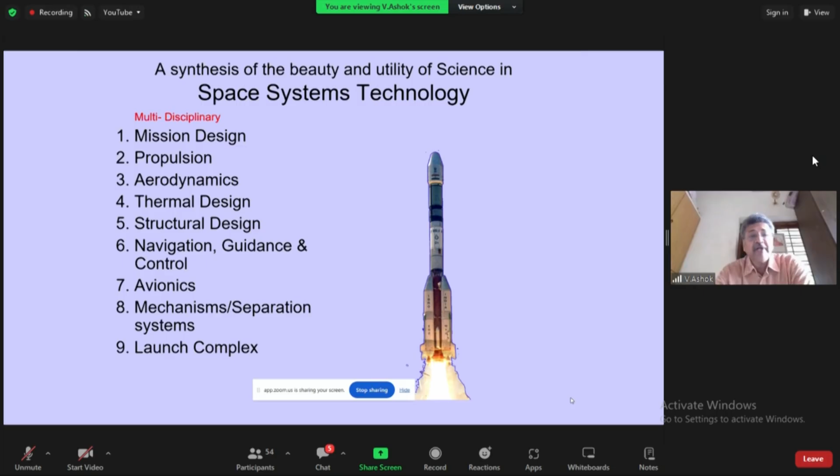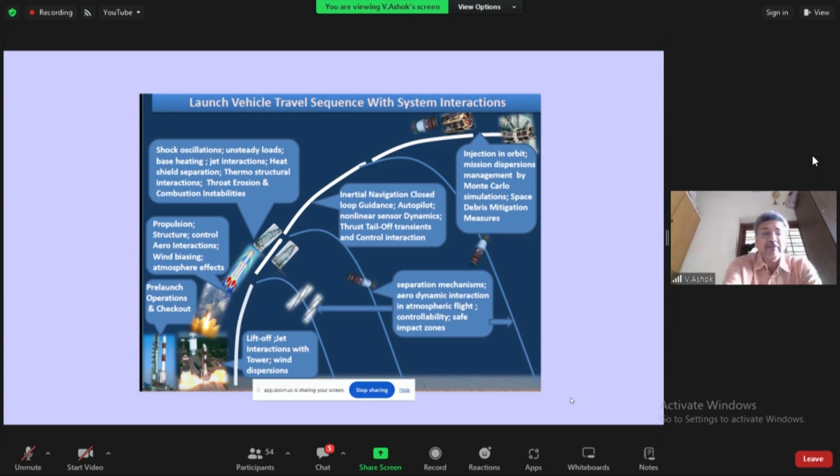So now, if you have to sum up the various challenging problems in launch vehicle missions, this one slide will tell you which are the very interesting problems. Right from the liftoff to the injection of satellite, we have various problems. At liftoff itself, we have the jet interactions with tower interactions and wind dispersions, and there are a lot of issues there also. Then moving on to the atmospheric phase of flight, you have the propulsion structure control aero interactions, and then the shock oscillations, unsteady loads, base heating. These are all in the atmospheric region of flight. Subsequently you have the closed loop guidance, etc., and injection into the orbit. So we will mostly focus on some of the interesting problems during the aerodynamic phase of the flight.

If you want to sum up the problems, on the left hand side you have the aerodynamic problems, and on the right hand side you have the aerothermal problems. You can see that there's compartment venting and the shock oscillations which cause the buffet. That means we have to quantify the unsteady forces. Of course, this particular aspect is still a challenge for CFD, because we still rely on experiments. Then there is also the aerodynamic noise coming from the strap-on shock interactions. Then there are jettisoning rockets which are used for separating the strap-ons, and the lift-off aerodynamics. These are some of the important things, and multi-jet interaction and aero loads on nozzles.

But we also have special problems like re-entry aerothermodynamics, flow and combustion studies in air-breathing engines, and dynamic stability of the re-entry capsule. This is one of the very interesting problems. That is, we have to calculate the dynamic stability, the aerodynamic damping that comes when there are oscillations of the crew module during the re-entry phase. And we also have two-phase flow with combustion. That is also a very interesting problem.

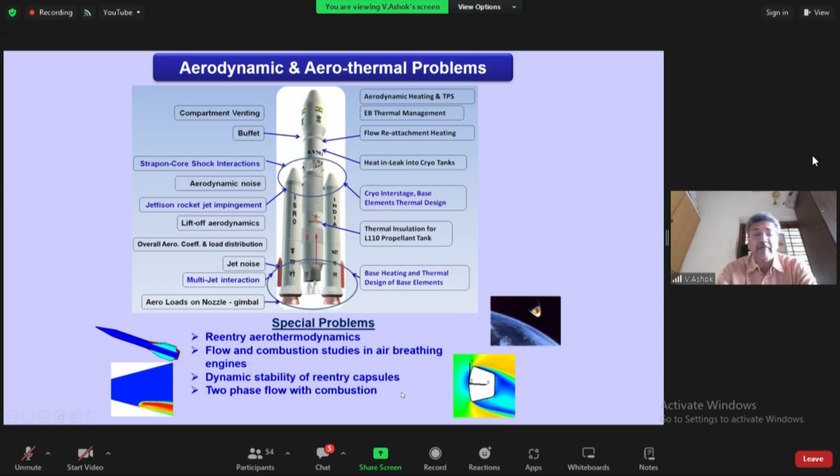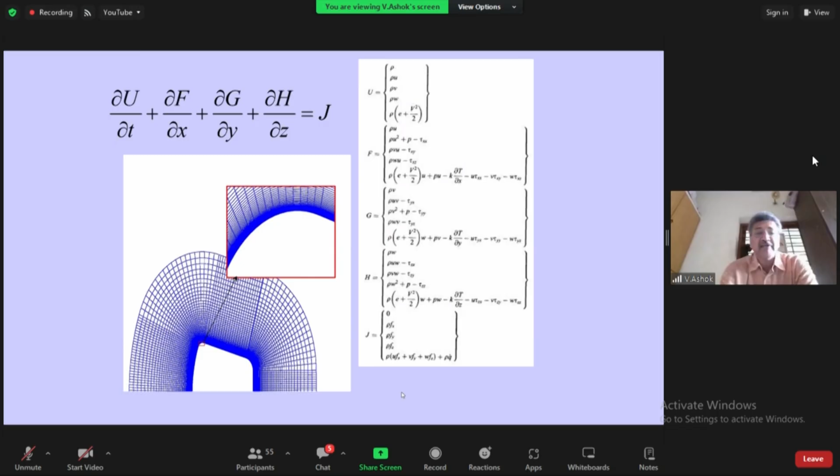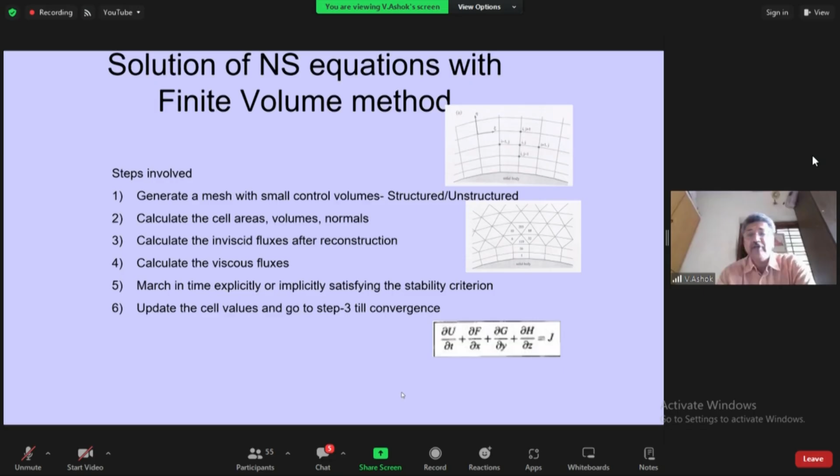As you know, in CFD we solve the Navier-Stokes equation, and I don't have to tell this audience about this equation. It is very familiar, and this is on a structured grid on a re-entry capsule. These are the steps involved: you generate a mesh, then you calculate the cell areas and volumes, calculate the inviscid fluxes after reconstruction, and then the viscous fluxes. You march implicitly or explicitly satisfying the stability criterion and update till you get convergence. So this is a very standard finite volume methodology. Now let me tell you very briefly about some of the solvers which we have.

One is the parallel aerodynamic simulator, which is on a Cartesian mesh, a very automated Cartesian mesh, and which has K-epsilon turbulence modeling, inviscid fluxes using an approximate Riemann solver. We use the primitive variable Riemann solver, and viscous fluxes by central differencing. We have second order upwind with a minmod limiter, and it is fully explicit. It's not in implicit mode, but it's parallelized with multi-threading on GPU platforms.

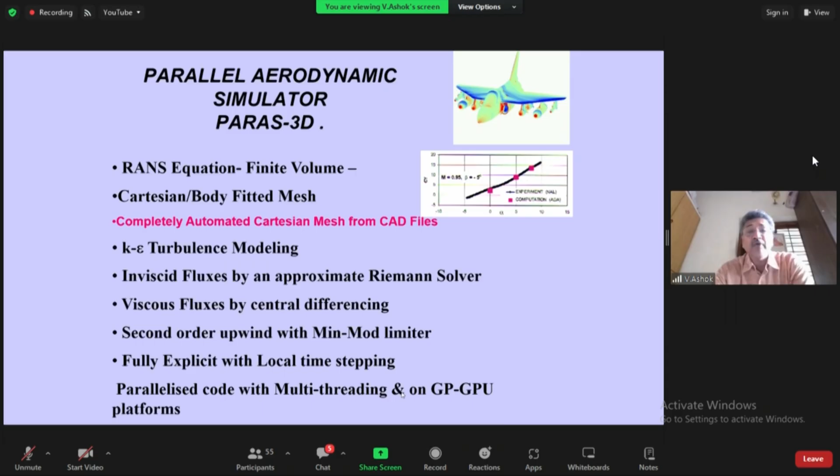And this code is now running in various organizations like ADA, ADE, DRDL, etc. This is a workhorse code for us because very fast we can generate the mesh and give the results. And these are some of the developments which we did on this. We have now included the multi-grid technique. The multi-grid acceleration is there, multi-core, multi-GPU version, and multi-grid CPU version.

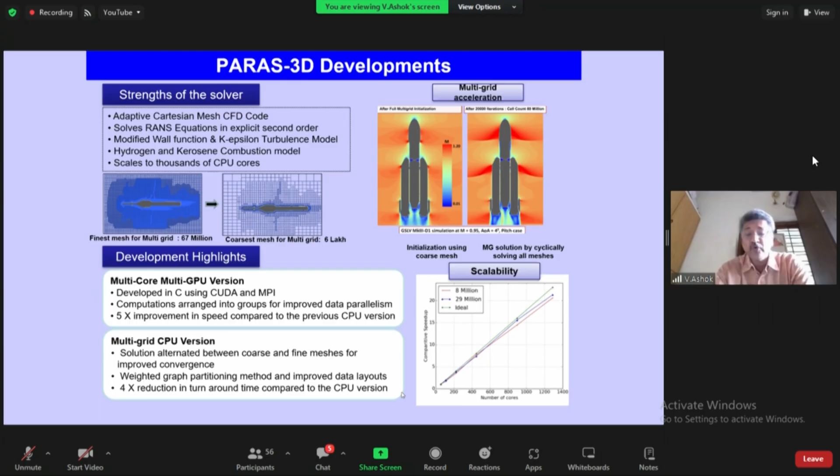And so we have done special techniques in this, which actually enhance the performance of even the CPU itself. Because as you know, all these CFD codes are memory bound. And so if you want to use the GPU platforms, we need to have a single instruction, multiple data type of architecture. So we need to group these cells before doing the computations. The computations are done group by group.

We have partial cells, then boundary air cells, partial cells whose neighbor is split, air cells whose neighbor is split, partial cells whose neighbor is split. They're all in different categories, so that you get maximum benefit from the GPU. And by doing these computations, the CPU performance itself has improved by something like 3x, 4x. So that is the advantage you get.

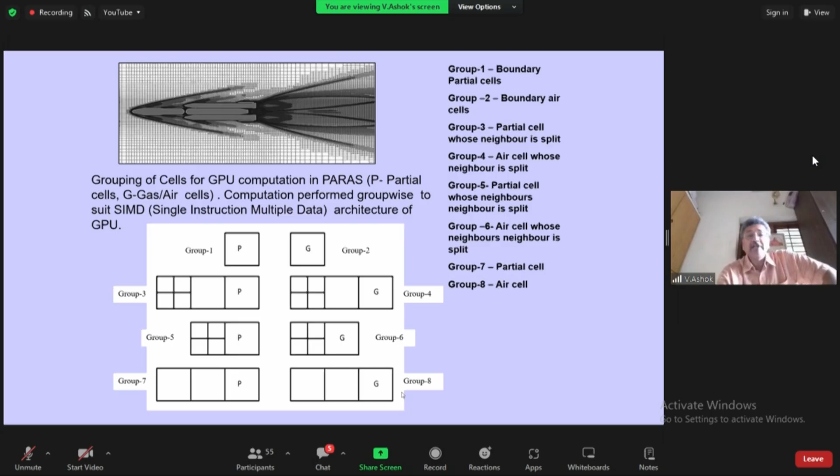And we also have an unstructured based parallel RANS solver for aerospace vehicle aerothermodynamics called Pravaha, which we have very recently developed and worked on for the past around 5 years. This is not on a Cartesian mesh, this is on an unstructured mesh. So the mesh generation has to be done by some mesh generation tools. And with this also we have various types of solvers like AUSM, AUSM plus, Roe, HLLC schemes.

But the challenge here is to build robustness in the CFD codes. That is where the real thing comes. In fact, if you are using solvers which are open source, you may find difficulty in those areas. Because in an industrial framework, suppose you want to do very fast computations, your mesh may not be very accurate. The quality of mesh may not be that good. There may be more skewness. But your solver should be capable enough to handle those.

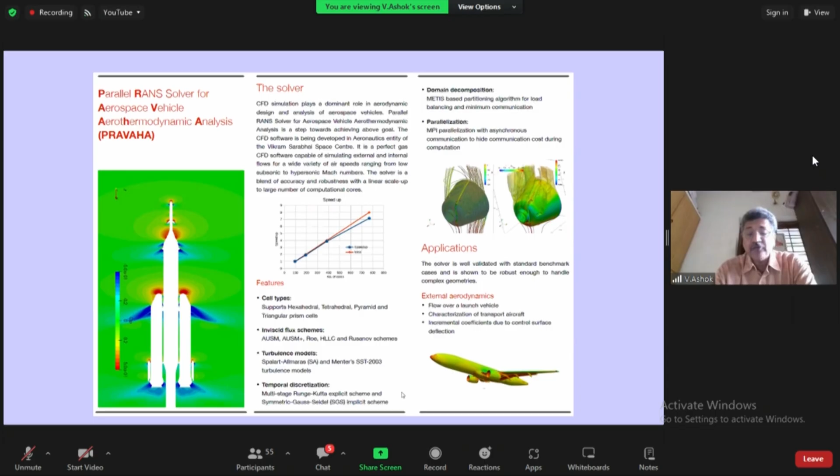You may lose accuracy. Instead of coming to 95% accuracy, you will get 90%. But in an industrial framework, that's okay, because when we explore various configurations, we want to weed out some configurations, so even 90% accuracy is good enough. What is important is you get very fast results, and you should be able to automate and couple with optimization techniques. That means it's very important to build robustness in the solvers. And we have done that using some special techniques.

And these are some of the applications which we have done. This is on a crew escape system with all those jets. We are also on the reusable launch vehicle technology demonstrator. And we also have something called the SPICES workshop during the symposium of applied aerodynamics, to be conducted on December 12th, where we put a standard problem and ask the CFD groups to solve it, and then we meet together and see how good it is, and the experiment results are not revealed.

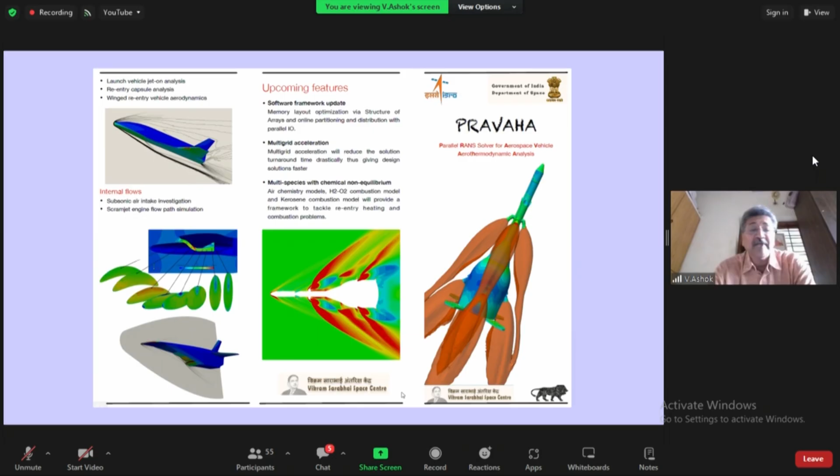So we are going to have a hypersonic air intake on December 12th. The geometry is given to all the organizations. Something like 15 organizations are going to participate, and we will see how the results compare with the experiment results. Now let us see some of the applications. This is a typical flow field of the GSLV at Mach number 0.9. You can see a terminating normal shock.

Now these normal shocks will start oscillating and will give rise to acoustics. That is where you have problems getting it from CFD, and you need experiments. But you can very well get the forces and moments from these CFD techniques. In fact, it is like a fluid dynamic zoo.

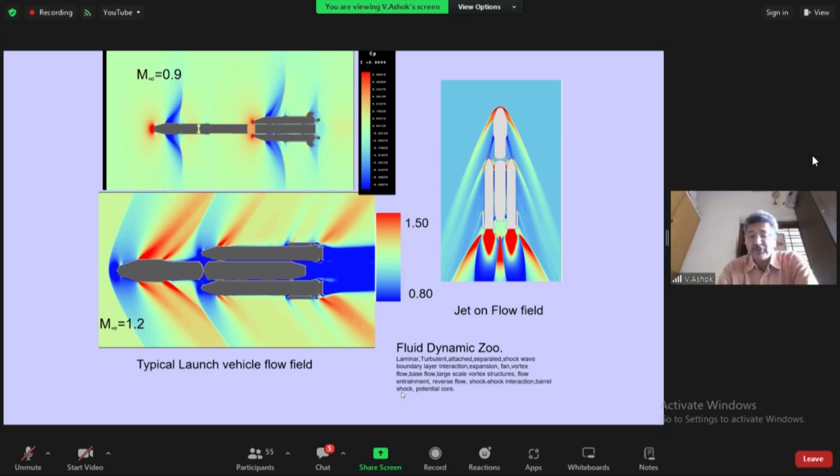You start with laminar, it becomes turbulent, then you have attached flow, separated flows, shock wave interaction, expansion fan, vortex flows, base flows, large scale vortex structure, flow entrainment, reverse flow, shock interactions, barrel shocks and potential core. All those things are there, so it's like a fluid dynamic zoo you can see in this particular flow field. This is a terminating normal shock on the cylinder.

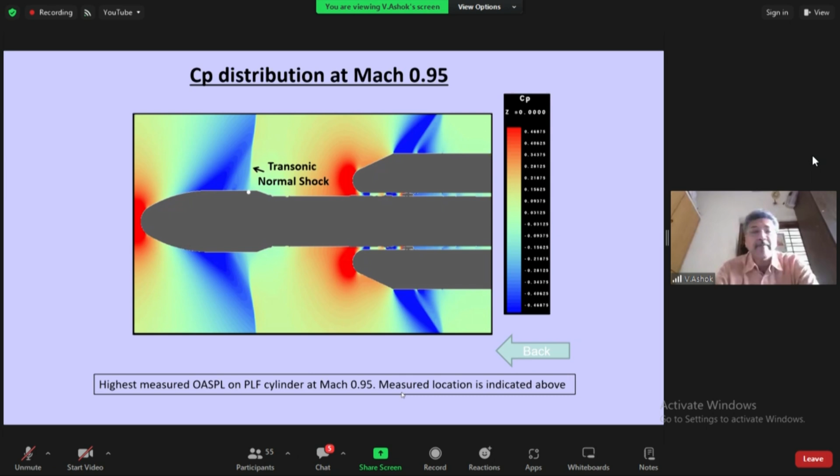Of the GSLV this one, but the real challenge is to get back what is the acoustics on this. Now, these are some of the challenging flow problems you can see here. We have certain things which are already carried out.

This is RLV reusable launch vehicle technology demonstrator, scramjet, GSLV Mark III, crew escape system at the pad abort test, and we had very recently done the landing experiment, the Chandrayaan 3, the test vehicle which we have done recently, the Gaganyaan, and then we have the future, the RLV orbiter and the scramjet. The airframe integrated scramjet with an air-breathing engine, where thrust minus drag positive is a very, very challenging thing. It is something like an X-51.

And high angle of attack aerodynamics for RLV landing experiments, multi-jet interactions in Chandrayaan 3, and also the dust that is coming because of the reverse flows, the test vehicle with the crew escape system, and we have also challenges in OneWeb mission of the launch vehicle Mark III, wherein we have the two-phase flow with the sloshing involved, and winged re-entry of the RLV orbiter.

Parachute inflation aerodynamics is one of the very, very critical things. What happens during the first few seconds when the parachute is getting inflated? Are you able to do an FSI, fluid structure interaction, and get the loads and see whether everything is fine or not? Then inflatable aerodynamic decelerators, these are things.

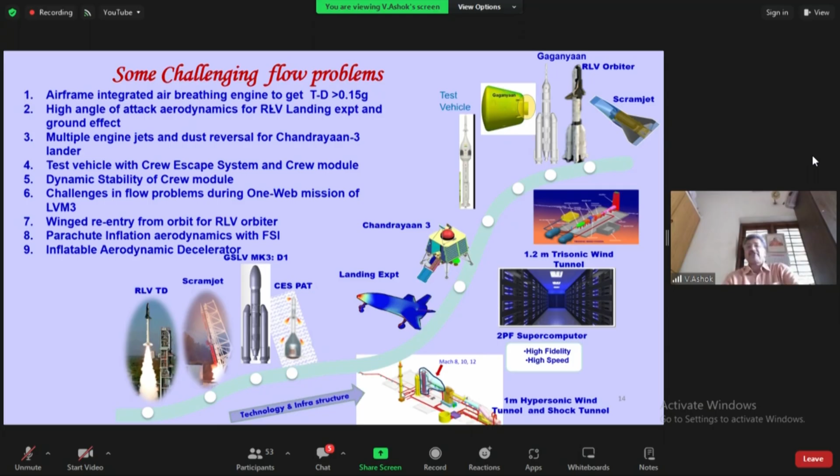And on the bottom side, you can see our capability in terms of facilities. We are now going to have the capability of wind tunnel testing from 0.2 Mach number all the way to Mach 12, and we are also going to set up a 2 petaflop supercomputer very soon. And this is some of the very typical things you can see here.

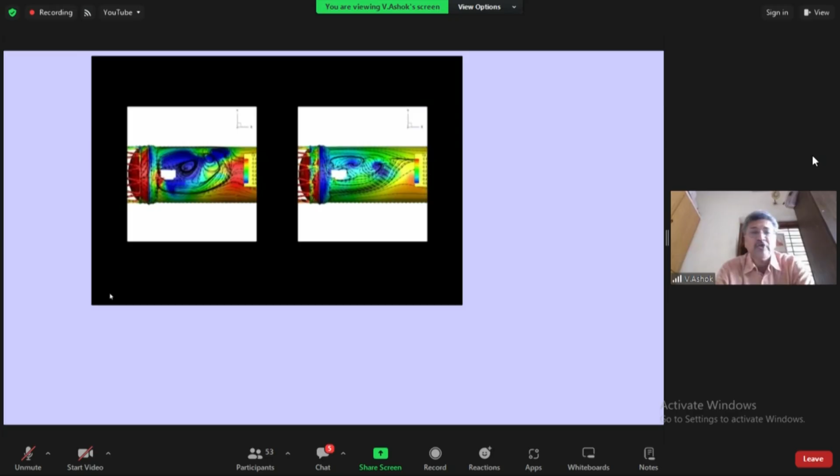This was the earlier configuration of the launch vehicle Mark III, which had a straight nose cone and also the strap-on also straight. And then on the left side, we improved upon it and made it a standard nose cone. What I want to stress is on the strap-on to nose cone attachment, there will be a vortex that will be shed, and this will give rise to larger acoustic levels. So you can see this is the case with the straight nose cone, and the other one is the standard nose cone. And this was actually giving us larger acoustic levels.

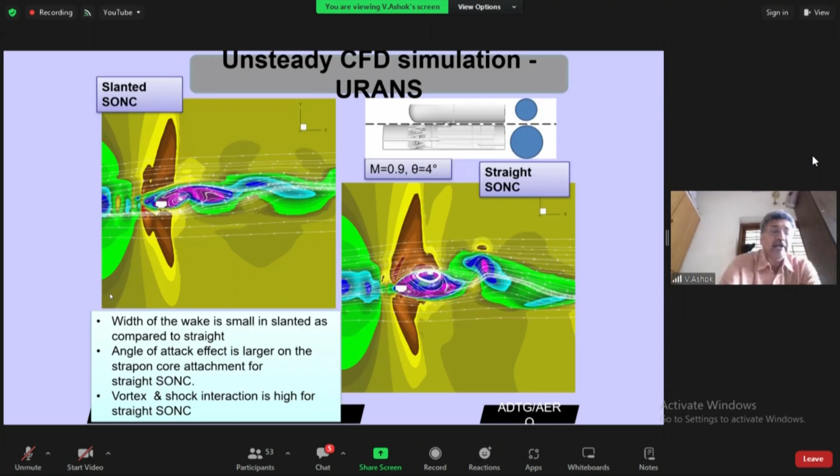And this is on the cut plane. You can see there the typical shock vortex interactions, which are enhancing the acoustics downstream. And this was what we got. We measured it actually, and we got benefit by doing this. We had almost 9 dB extra in the adapter just behind the strap-on nose cone. So this is the benefit you get by doing such studies. It's an unsteady study, of course, a URANS study.

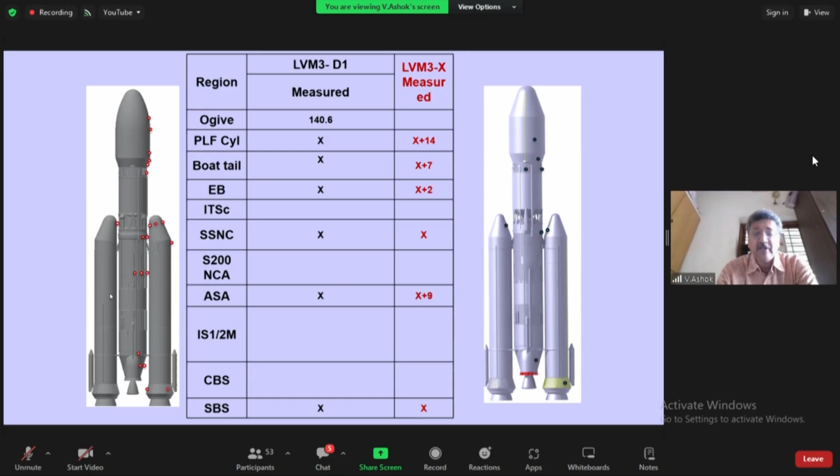And the way in which we do the aero data methodology is, of course, this is the flight configuration. We have the wind tunnel test. And of course, the wind tunnel will not be the same as the flight configuration, so there may be some differences. That difference is called the geometry correction, and the CFD does the corrections.

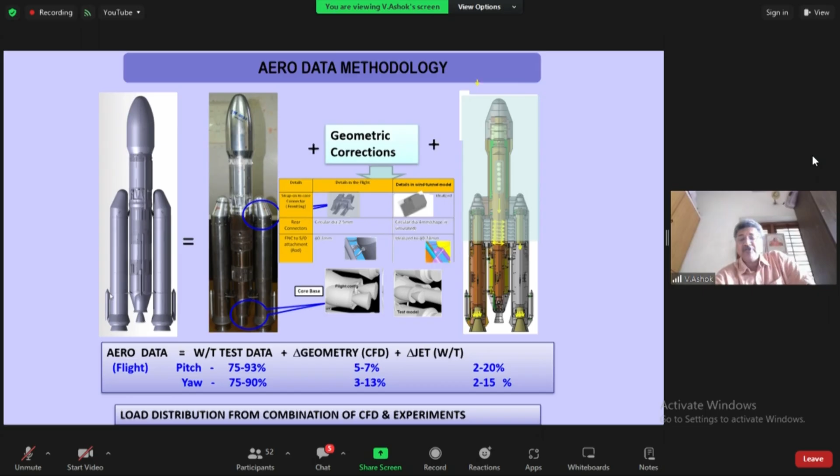And then suppose there is a jet. You cannot do experiments with hot jets. So we either do it with a cold flow experiment with the jet, and the hot flow from CFD, and these things are getting accounted. That means you have basic data from the wind tunnel, you add the geometry corrections from CFD and give the flight data. So this is the way in which you generate the aerodynamic data for the entire vehicle, which is used for the control studies.

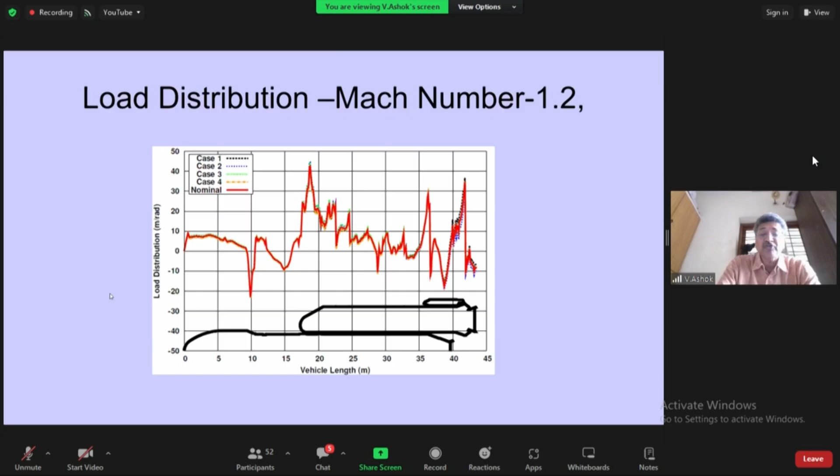So this is the typical load distribution which we give. That is the load, per meter per radian, and this is what is going into the structural design. In fact, all the structural designs are initially done using CFD and only then verified by means of experiments. That means CFD has to play a very important role right from the design phase to actually finalize what should be the structures. So this is another important aspect of CFD.

Then another thing is the base heating of the launch vehicle. As you know, when the launch vehicle climbs the atmosphere, the pressure drops, and so the jet pressure ratio, that is the exit jet pressure to the atmospheric pressure, increases, and the jet plumes. And when you have this pluming, in supersonic flow, like you can see from Mach 2.5, there's a jet-jet interaction, and that jet interaction causes a shock.

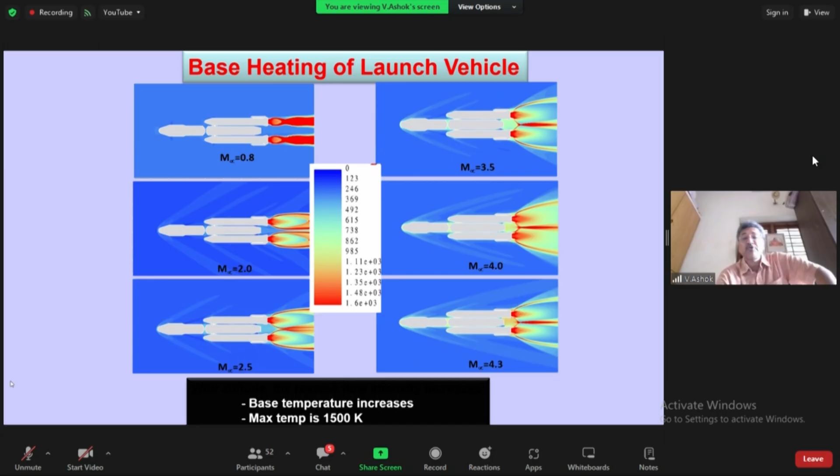And then what happens is there is a reverse flow that is coming here. So the oncoming flow is not able to penetrate those shock-shock interactions. So there's a reversing, which gives rise to heating in the base. And this has to be quantified, and we should define the thermal systems for this. So this is what we first quantify, what is the heat flux that is coming because of this, and then do special experiments to design those TPS. So this is one typical application.

Then another interesting thing which I would like to tell: in one of the flights of GSLV, we had the first flight where, when the strap-ons don't generate sufficient thrust, around something like not more than 98% or so, they will cut off. So one such thing happened, and although the cutting off happened in all the 4 strap-ons, the fire happened in only one of the 4 strap-ons. Then the question was, why did it only happen in one? Because you have a fuel-rich propellant that is coming out and mixes with the external oxidizer, oxygen-rich, and then there is burning that is happening.

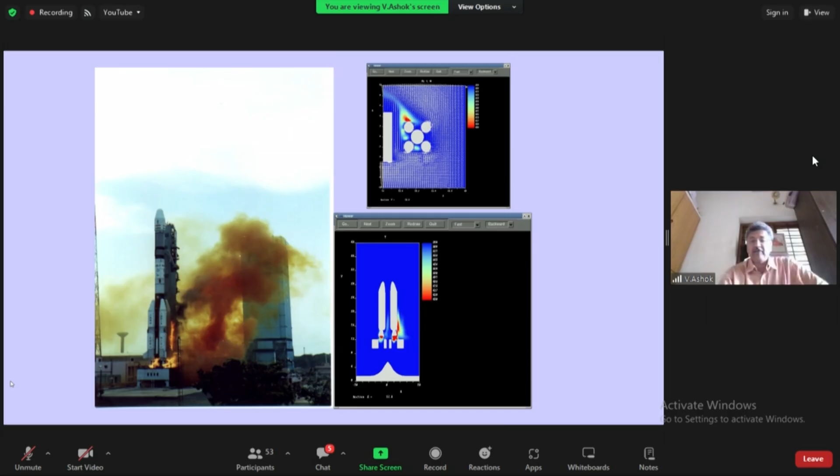So we did the simulations with the wind prevailing at that time, and we can see that there is a vortex formed at that particular strap-on, and because of the buoyancy, it comes up, and that's how you see the flame in only one of the strap-ons.

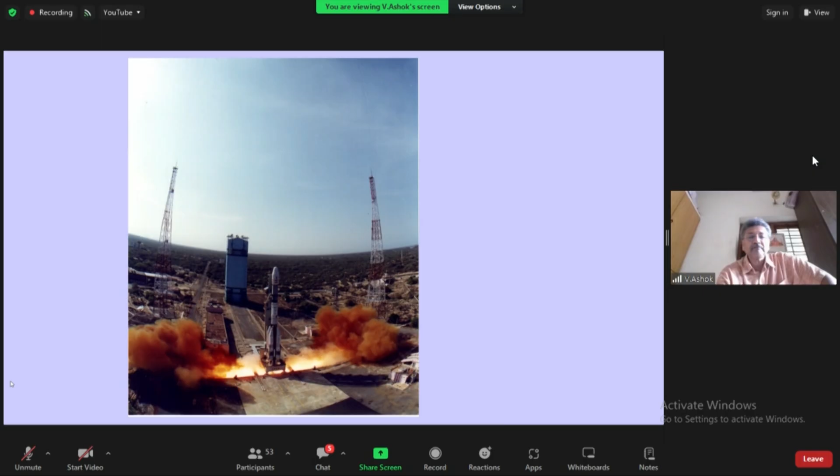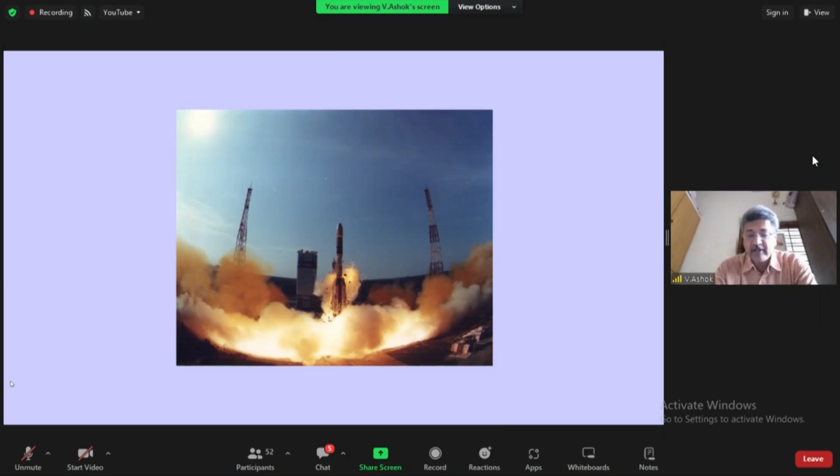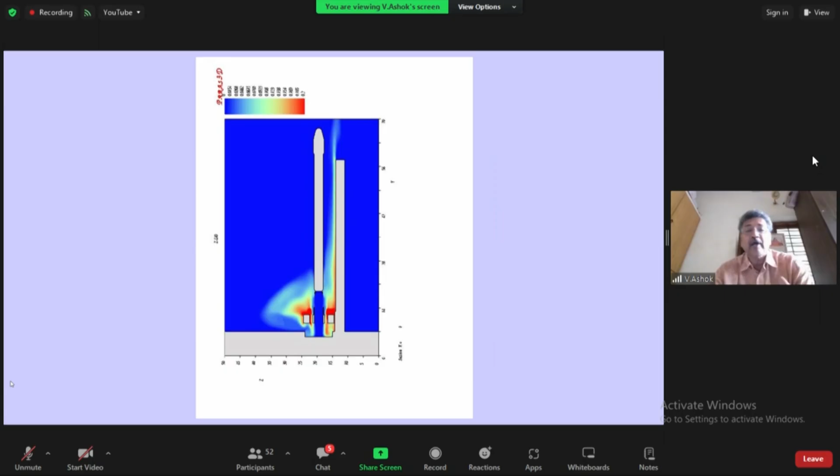And this is another thing, just on the launch pad, where you are seeing the jet flows. But what happened at around 2 seconds later, at 5 meters, you can see a reverse flow of jet that is coming between the umbilical tower and the launch vehicle. We wanted to see why this is really happening, so we had CFD simulations done at these particular conditions. And yes, indeed, we found out that there is a reverse flow of the L40, that is, the liquid strap-on jet is reversing, and we want to know why this is happening.

So what really happened? This is on the launch pedestal. When the jet is impinging, it flows in all directions. Now we can see here that there is a condition where you have the launch tower here, so this is not allowing it to go to this side. So if you take a cut section in this, what we are seeing is there is a fountain jet that is formed. Because of this fountain jet, we are seeing that there is a reverse flow that is happening.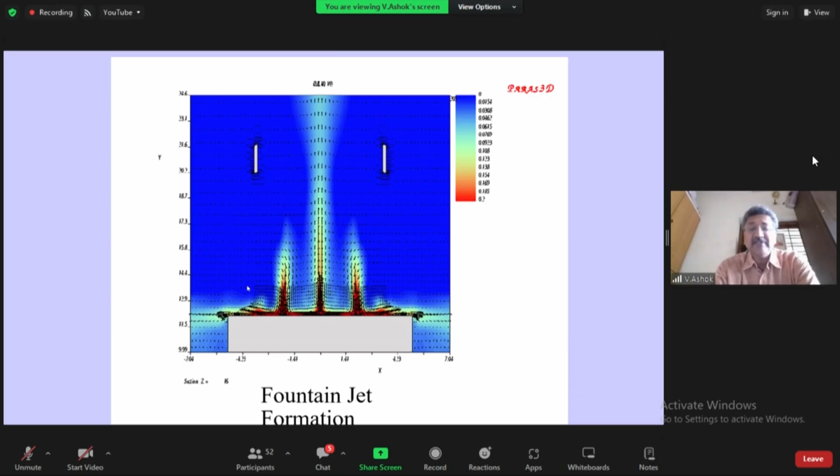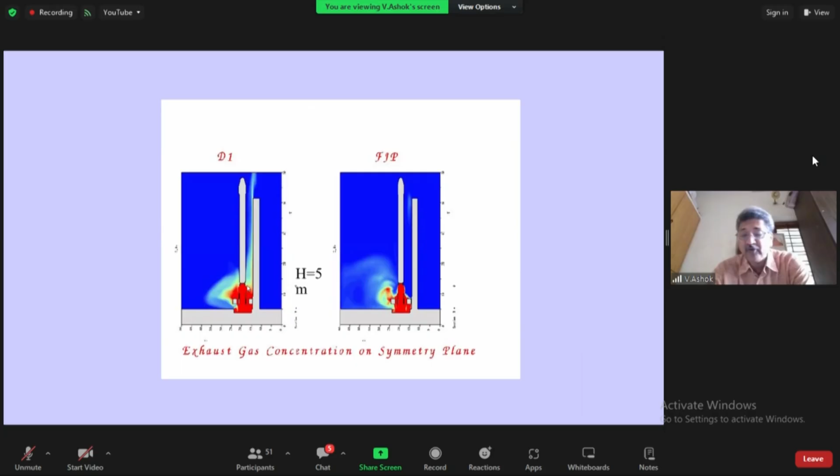So how do you prevent the fountain jet? You just put those diverters there, and we indeed did that. And then we can see here that we are not seeing any reverse flow. This was done way back in the year 2000, but I just wanted to show it, because this is one very important application where CFD is able to give solutions. And this is what you can see on the plan side: because of the diverter, you are seeing that the jet is getting diverted.

Now there is also another problem, on the L40 gimbal. These nozzles are gimballed, and that's how the control is activated. Now we need to find out the aerodynamic load on the nozzle, because the control system needs that input. But when you do the wind tunnel experiments, you do them without the jets. And we found out that without the jets, you get a very large load, and that is a problem for the control system. So when we did it with jets, we found that the loads were indeed much less.

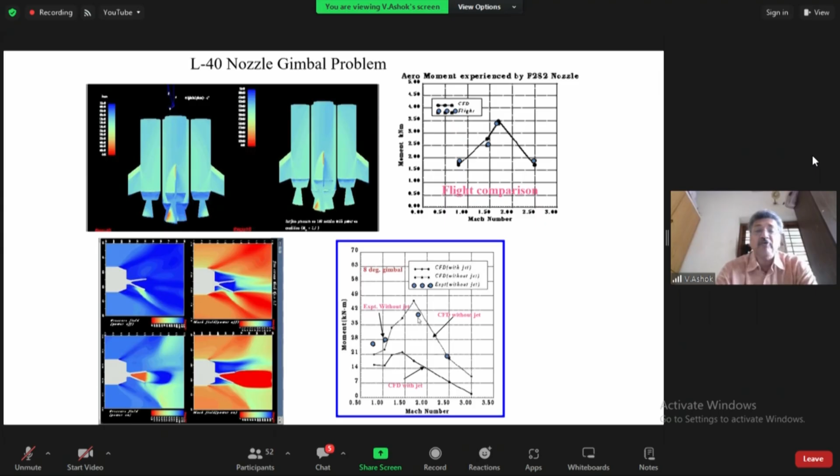And that's what you can see here in this graph, where experiments were done without jet, and we also do CFD without jet. Once confidence is built up without the jet, you design for this with jet, and then we also got a comparison from the flight, and we really got a good comparison of the moments coming because of this. So this is another application which I wanted to highlight.

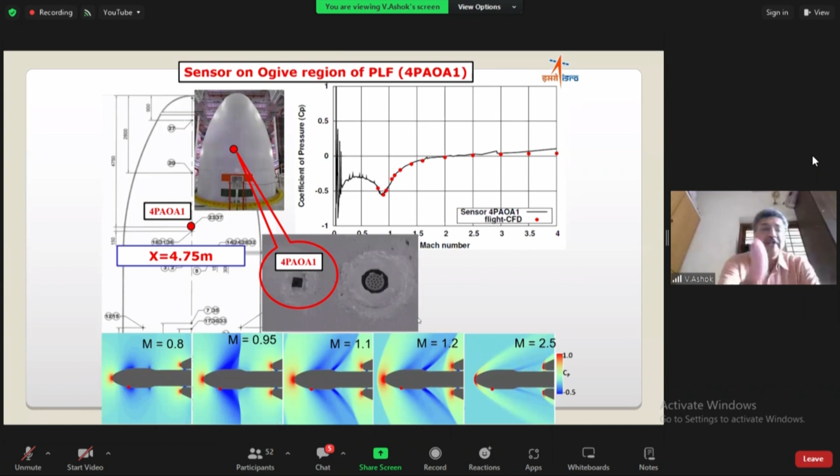And these are the several types of steady pressure measurements that are done on a launch vehicle at various parts. I'm just showing the typical match, and these are all fairly tractable problems at different places. On the red portion, we can see here, at transonic Mach number, we have a sudden dip in the coefficient of pressure. Anyway, these are all well captured by CFD. There is no issue.

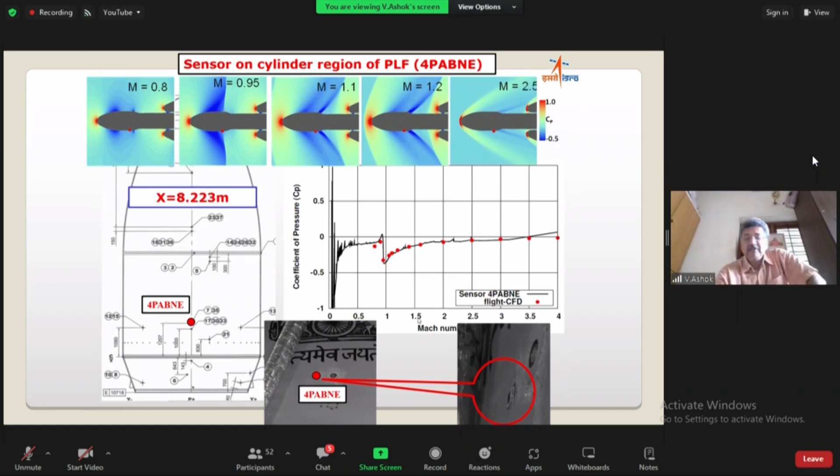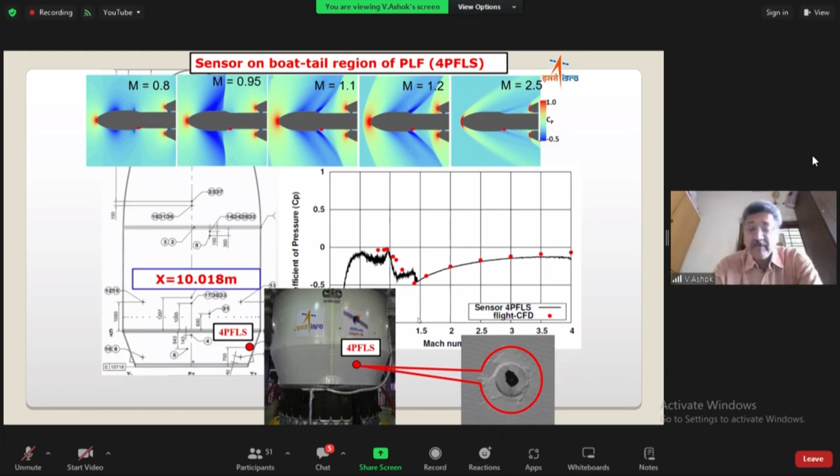And this is on the boat tail, where you have a separated flow, and there only we have some problems, because when the flow is separated, you have the issues of getting the pressure very exactly, unlike the attached flows, and because it already depends on the turbulence model which you employ.

This is another important thing, the stability with the jets. Now you can see here, this is without jets. But as you know, when the launch vehicle goes up, the jets are there, and that really affects the stability. Now you can see how we compute the stability for this. You do a CFD with jet off and with jet on, and what you can see here is up till the base, there is no difference.

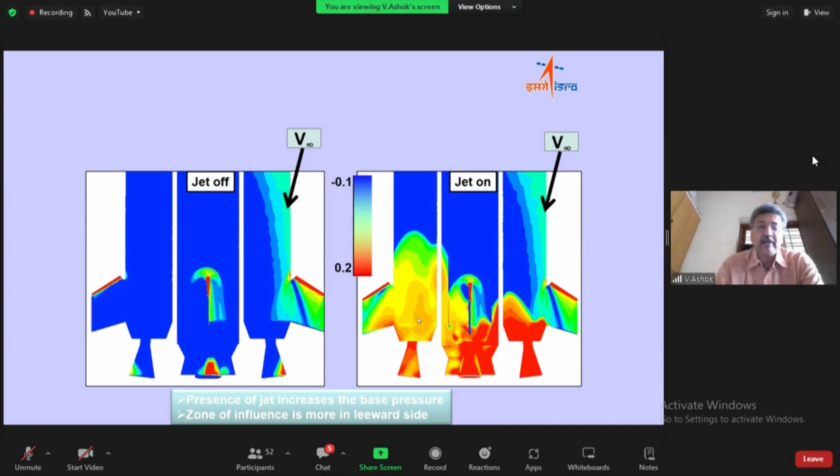But at the base region, you can see the jet-jet interaction alters the flow field. And because of this, it becomes more unstable. And this is what you can see, the palettes, which show the effects of the jet-jet interactions at the supersonic Mach numbers. And we really notice that there's a decrease of CN alpha by 14%. And XCP was moving towards the nose, that is making it more unstable. You can see the center of pressure location without jet and with jet.

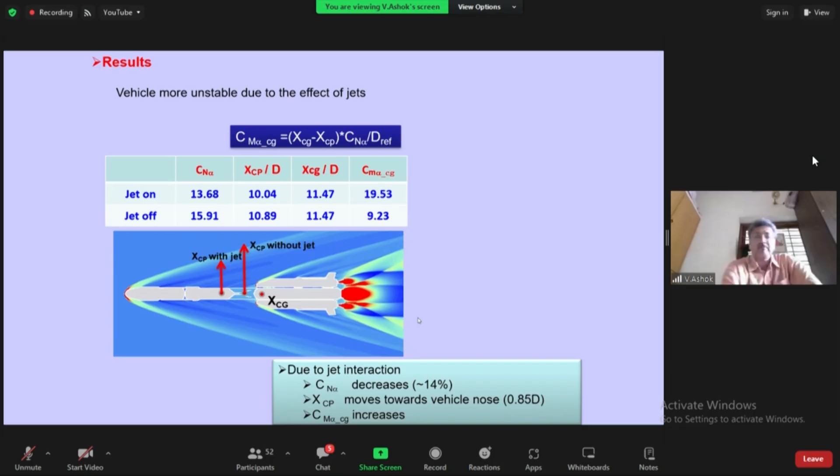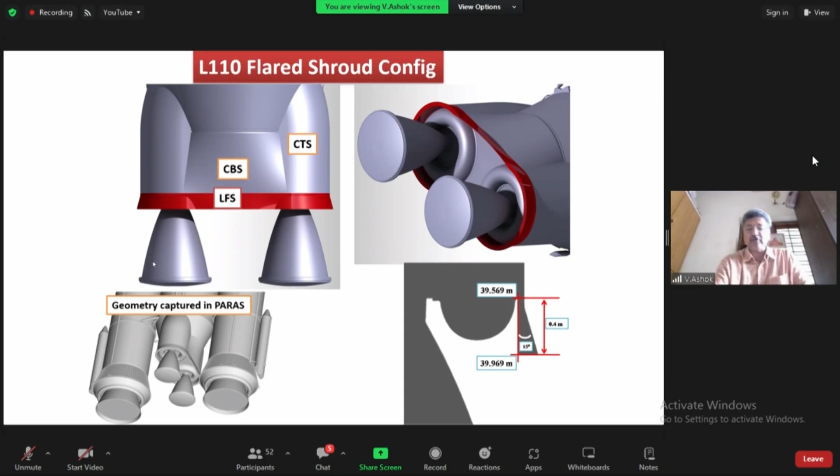Well, this is another application which I wanted to show: we put a flared shroud on the base of launch vehicle Mark 3, because we are seeing that there's a flow that is getting separated and reattached on the nozzle. And this particular problem wanted to be alleviated, so we put a flared shroud so that it just doesn't reattach on the nozzle.

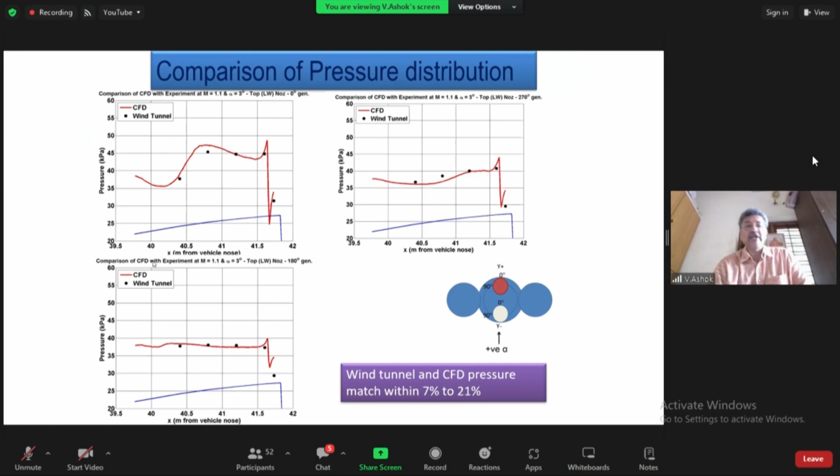And that's what you can see here without the flared shroud. And with the flared shroud, you can see very clearly how much the pressure reduces, thus reducing the loads on the gimbalable nozzles. And this is all the experimental validation for that. This is another thing which I wanted to highlight.

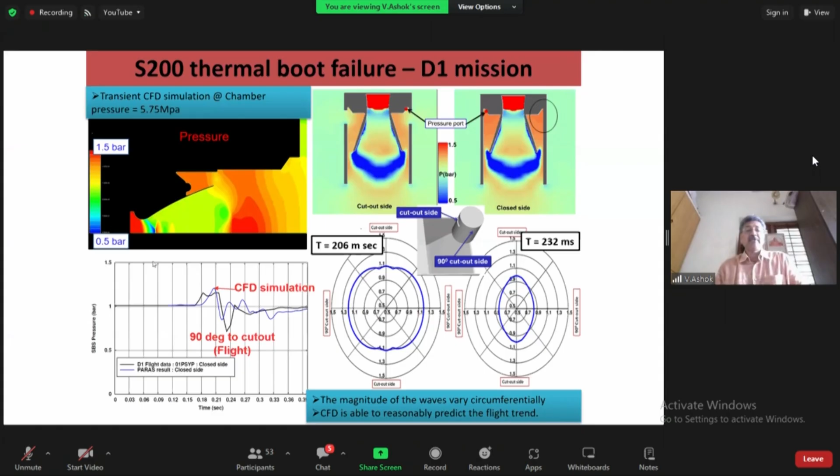Of course, there are also unsteady problems. When you start the engine, the nozzle will be having a closure. That closure breaks, and there is a jet that is coming out, and what's called the jet overpressure has to be quantified, and all these subsystems at the base have to withstand that. So this is one such unsteady simulation which we carried out to quantify that, and these thermal boots are designed to handle that.

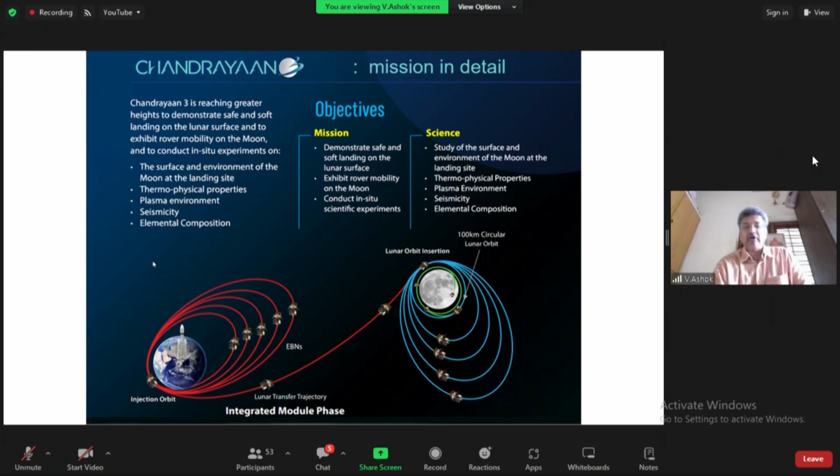Well, this is on the Chandrayaan-3, which I wanted to tell, and all of this I need not delve into in detail because it's quite popular. And these are the several types of firing which you do on the Chandrayaan, and this is the approach. But what I wanted to tell was on the fluid dynamic aspects.

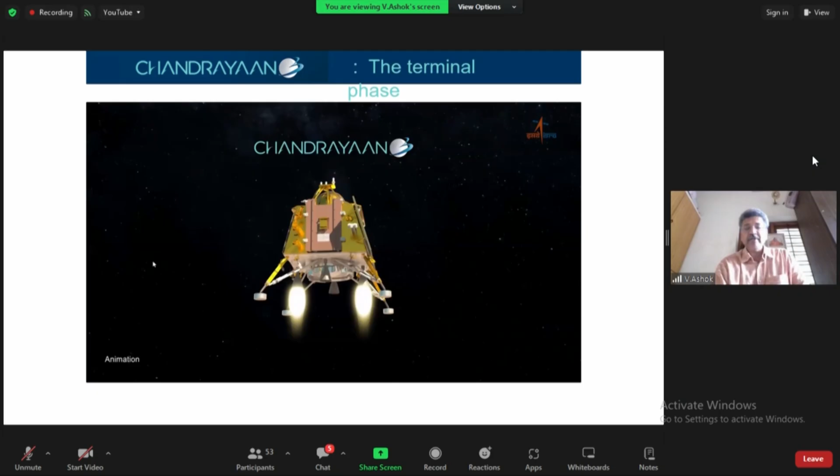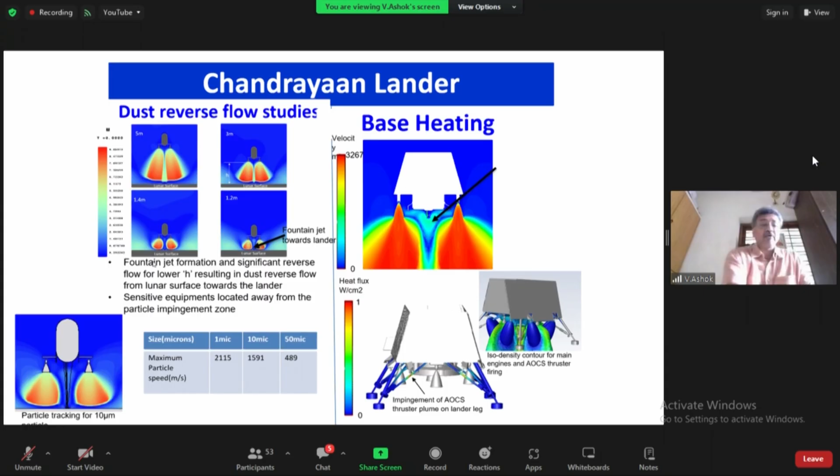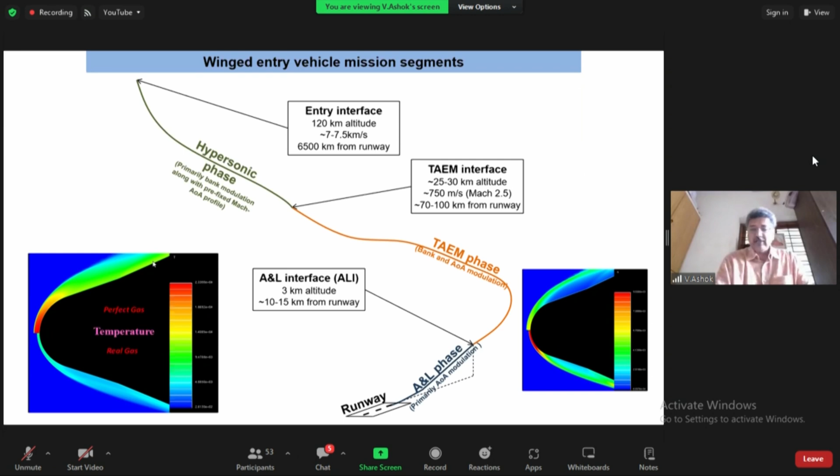That is mainly because you have a very high temperature at the stagnation point; oxygen starts dissociating at 2000 Kelvin, nitrogen starts dissociating at 4000 Kelvin. And the dissociated gas becomes cooler. When you have cool gas, you can push more mass in the same stream tube, and that's how the shock gets closer. So these are all the phenomena that are there. And we had also done various simulations to quantify these heating levels. Of course, the wall also plays an important role.

We have something called the catalytic wall and non-catalytic wall, which means that the dissociated species, O, the nascent oxygen, and N, can recombine at the wall and dump the heat of diffusion, that is the dissociation heating, on the wall, and so that has to be prevented.

And so we have special materials like RCG, which will prevent this recombination of the species - recombination of O to O2 and recombination of N to N2. And these are some of the things.

And there's also something called the gap flow, because these elements have to be moved and there will be a gap. And when you have this gap in hypersonic flow, what is the gap heating? This has to be quantified correctly, and we have to design the seals for this. And these are all some of the RCS that is fired.

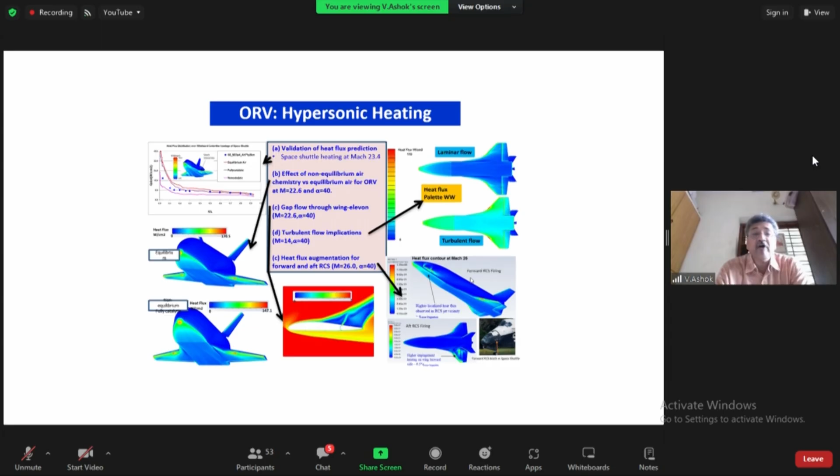And in the hypersonic flow, how the RCS affects the aerodynamics of this also has to be quantified. And these were all done using CFD. And this is on the RLV landing experiment which we did.

And that is the approach and landing phase. And that portion has been done now, and autonomous landing has been enabled. And for this also, we need to generate the aerodynamic coefficients for the control design. And here also this was done.

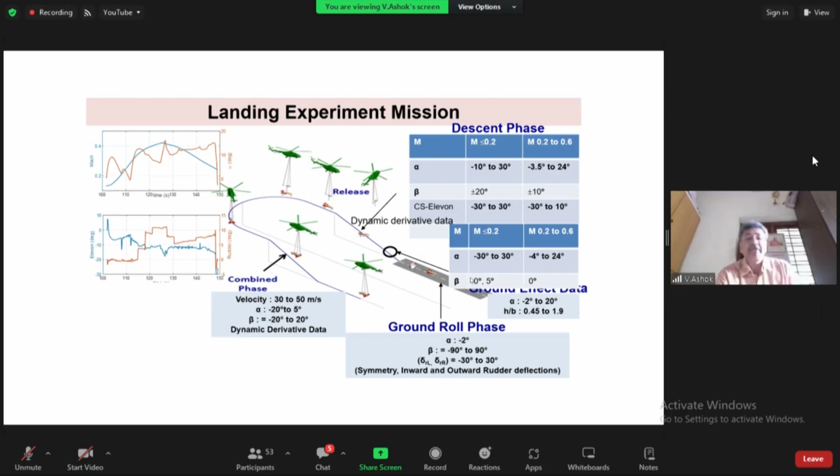And this is with the helicopter downwash. We had done first initially in the MI-17, and now we have done later on with Chinook, and this is the downwash of that, and seeing that the downwash doesn't affect the vehicle. All these CFD computations were done to quantify this.

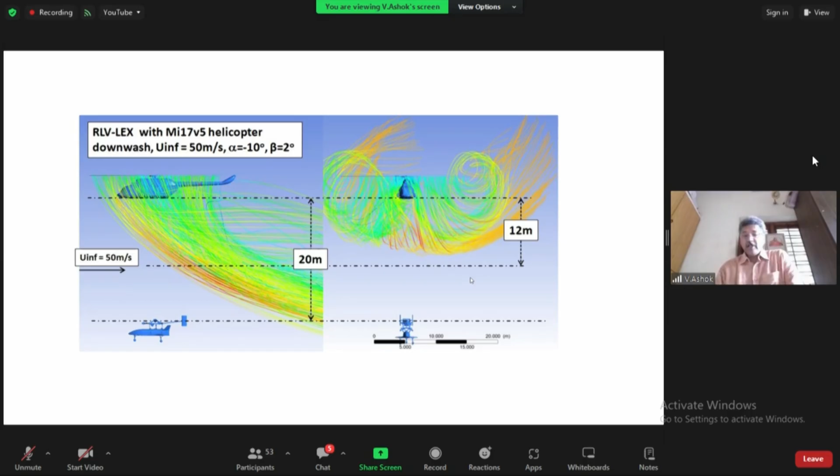And this is at various angles of attack when it is coming down, and what should be the limiting angle of attack and what the stall angle of attack - all those things we had computed. Of course, we also did several wind tunnel experiments in IIT Kanpur and NAL. And so we had seen how the wing vortex and the vortex breakdown happening at what angle of attack. So these things were quantified using CFD.

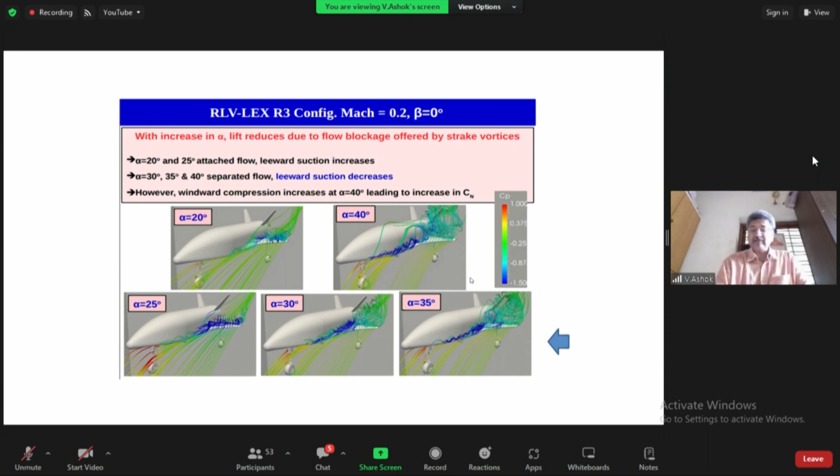Now coming to one of the very interesting problems - the moving unsteady problems. See, we do a heat shield separation. Now normally what we do is, now we should be able to minimize the cost, which we are doing by this testing. Now, this heat shield separation occurs almost at rarefied conditions, near vacuum.

Now, as you know, none of the launch vehicles we do without testing. So the philosophy is test as you fly and fly as you test. So if you want to test as you fly, then you have to have a huge vacuum chamber to accommodate this heat shield.

And then we have to separate on that, which costs a lot of money. And so what we have done is - why not do it on the ground and quantify what is the effect of the atmosphere, and then see what will happen for the flight. So that's what was done for this particular condition. So we did this heat shield separation on the ground.

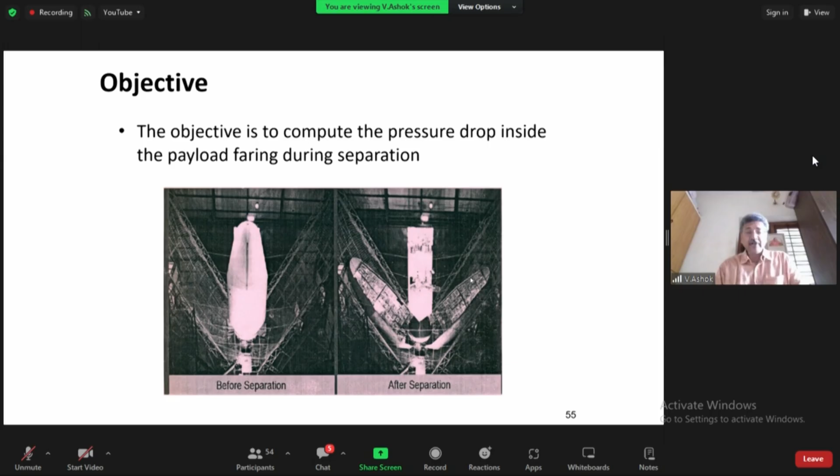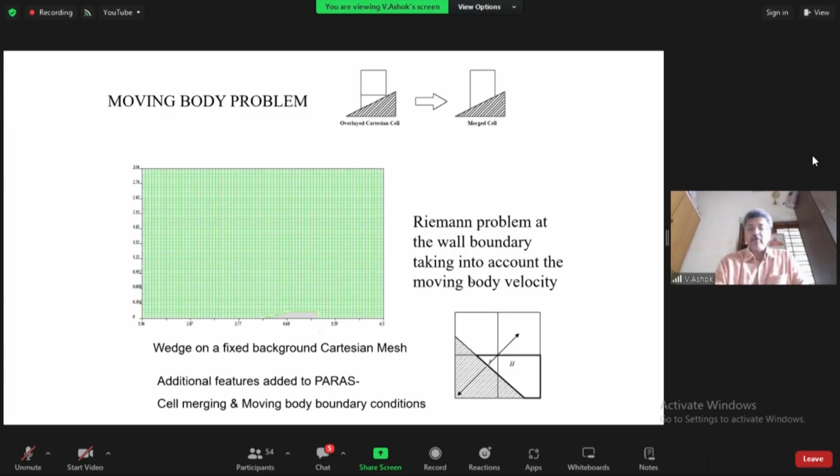And on the ground, what happens is this is a moving body problem which we have done using a Cartesian mesh. I did not go into details of this, but we have to have a special type of Riemann problem to do this, and some cell merging and moving boundary techniques are there. But what I want to tell in summary is, this is the heat shield that is getting separated, and so initially you have a very large acceleration.

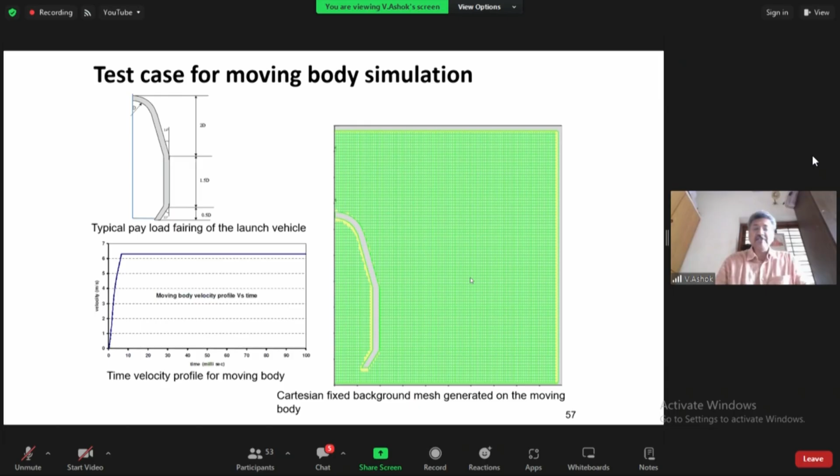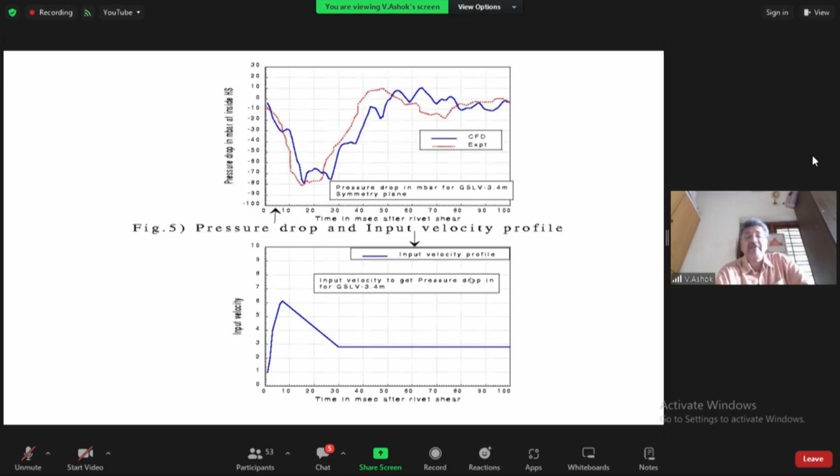And because of this pressure drop, there will be a collision, and you will find that there is a collision, but this will not happen in vacuum. So that's what we found out. And so we are now doing away with all this, because Ariane does it with the rarefied conditions, which cost a huge amount of money. So this was debated way back in those years, and then we avoided this by quantifying from CFD. This is another typical thing - the inflatable aerodynamic decelerator.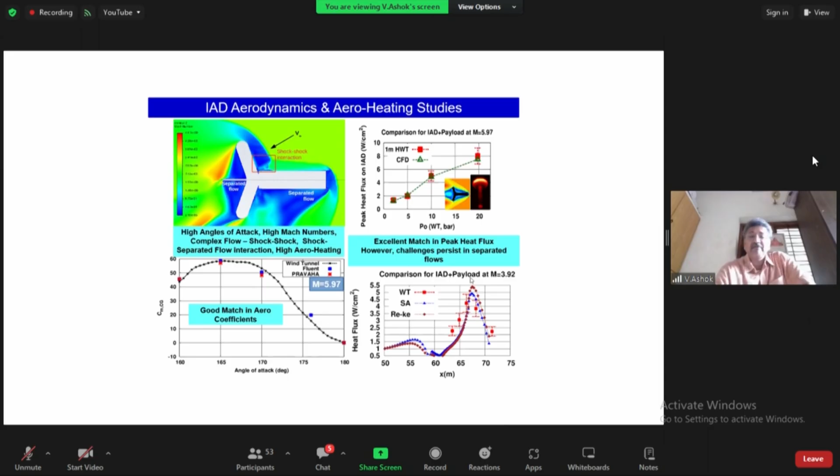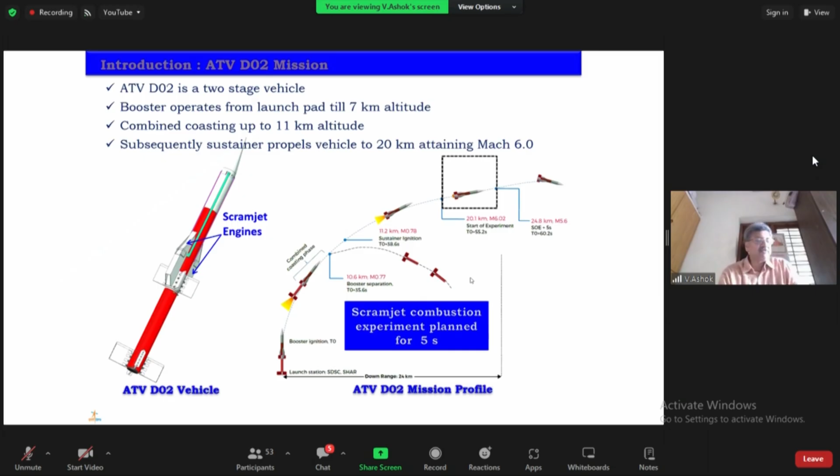For this, we need to do chemically reacting flows. This is one of the Lehr cylinder cases where you have a stoichiometric mixture of hydrogen and oxygen at Mach number 3.55. What is interesting is, although there is a temperature rise due to the shock wave, combustion happens only downstream, meaning there's a finite time for combustion to occur. This is a typical case of validation of a non-equilibrium chemically reacting flow. A Lehr cylinder of 15 mm diameter is a typical case for reacting flows.

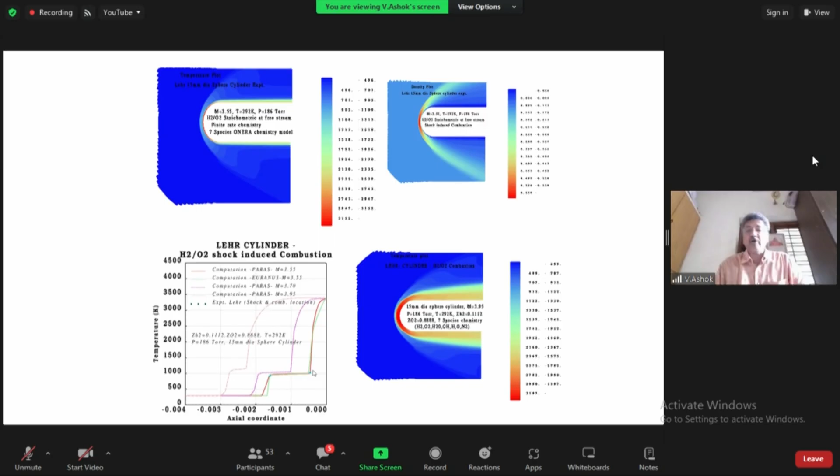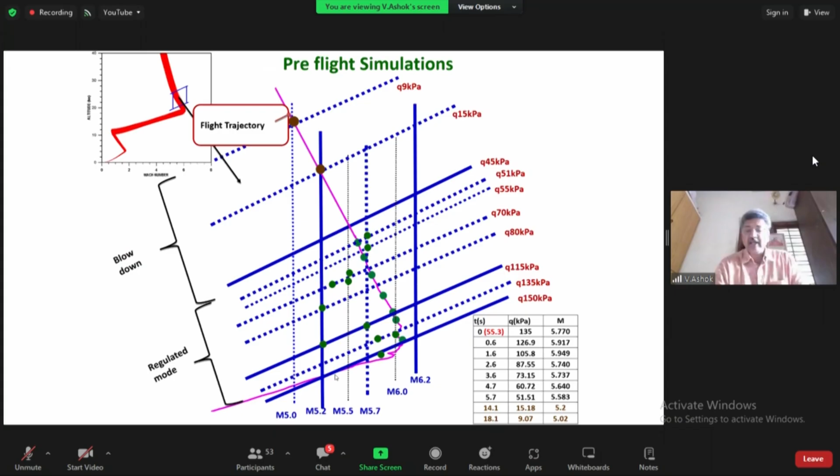We can see this is the shock front and the combustion front later. That is the validation which was done. This is the trajectory in which we had gone and done some experiments, and you can see here there's a non-reacting flow and the reacting flow.

What is important is to demonstrate supersonic combustion. What do you mean by supersonic combustion? When the combustion occurs, there should not be any upstream influence. That's what we are precisely seeing from this plot: upstream of the strut, whether it is non-reacting or reacting, it is exactly the same.

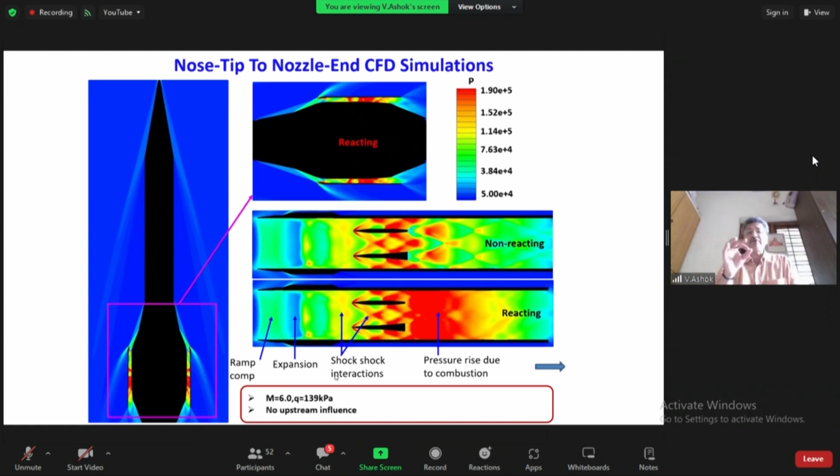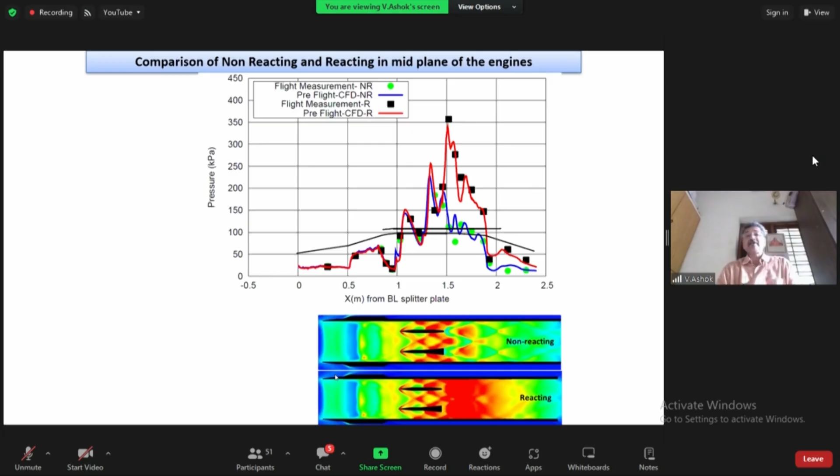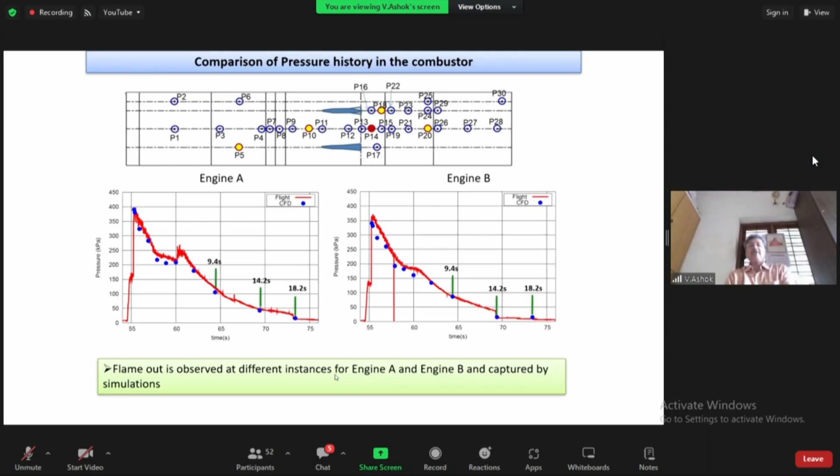We also had further points at different conditions, and we could even get the flame out of this. So this was a very highly successful experiment of the scramjet demonstration. As you know, scramjet is always called lighting a lamp in a hurricane. So that is how it is: you stabilize the flows behind the strut and then do the combustion.

But there are some problems even in this, in air intakes. Suppose we are now working on an airframe integrated scramjet engine where we have 3 ramps, and the cowl shock impinging on the ramp causes the separation bubble. This separation bubble is very dangerous because it grows, and there will be an unstart of this engine, of this intake. So we have to correctly predict the size of the separation bubble.

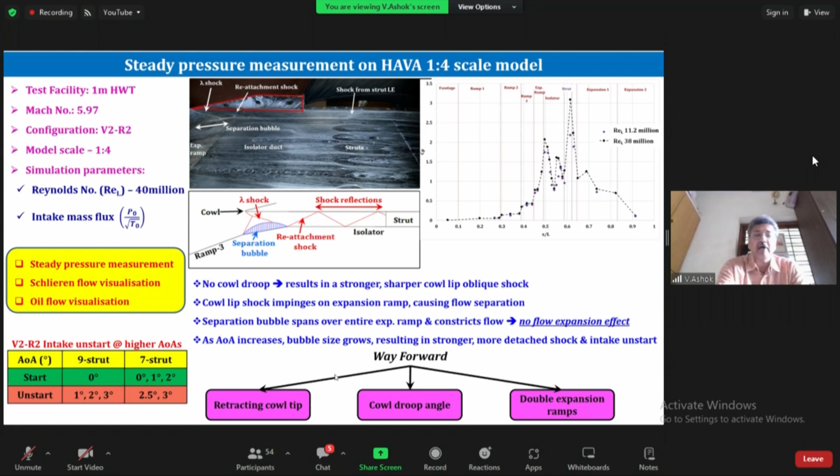We did have surprises because there are a lot of differences if you employ a realizable K-epsilon model versus an SST K-omega model. Precisely getting the size of the separation bubble is very, very difficult unless you tune the coefficients of those turbulence models. So these are some of the things. Of course, we are doing away with that by retracting the cowl tip or making the shock strength lesser. These are some of the things we are doing later.

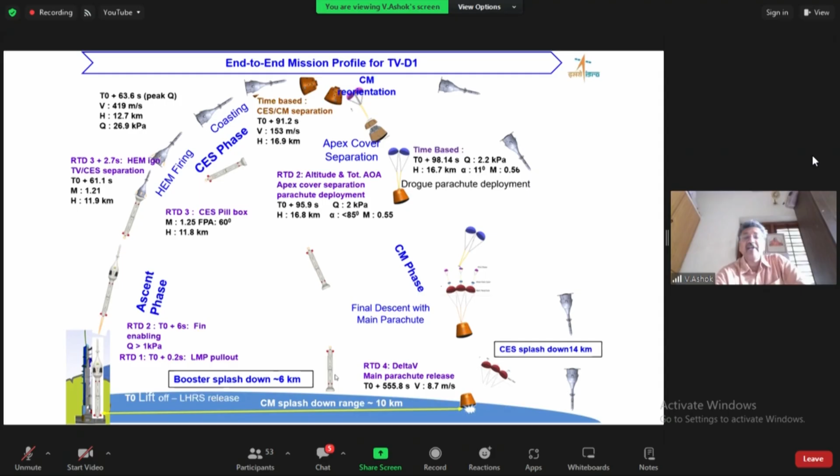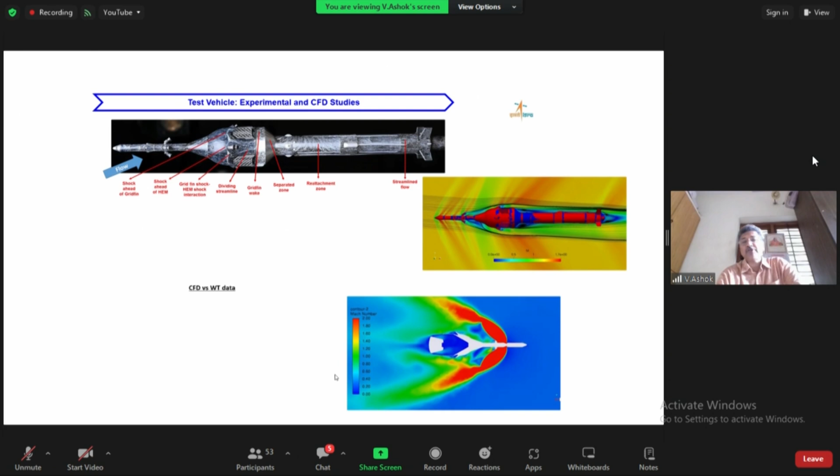This is on the end-to-end mission of the TV-D1, where we had phases and we wanted to demonstrate an abort of the crew module. This was done very recently in last October, and this is on the typical flow field for this. We also do internal experiments, oil flow visualization, and CFD, and study how with the HEM jet, the high altitude escape motor jets firing, it gets separated from the crew module. All those simulations are being done.

This is on the Gaganyaan mission profile, where we have the orbit of 170 by 408. This is a very challenging mission which is going to happen very soon, and for this, all the preparations are on.

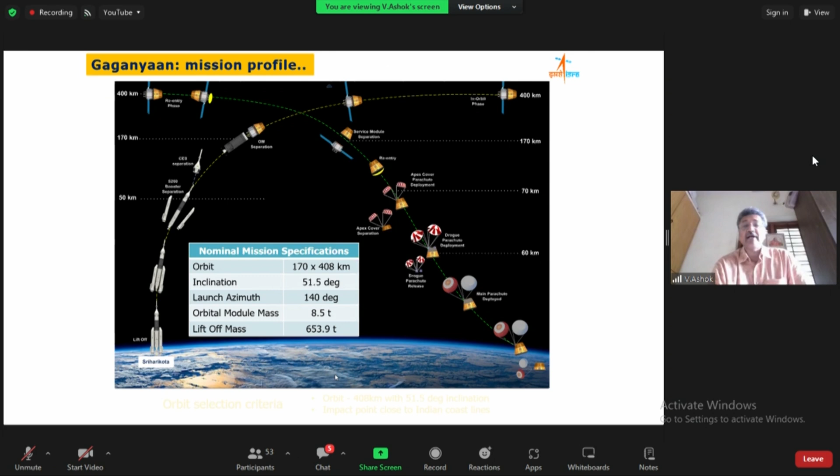Here what is important is the re-entry phase, where you have very high heating coming, and we should have a proper thermal protection system, and also the deployment of parachute and the associated oscillations, and the dynamic stability of this. We have done simulations for Mach number 21 and alpha minus 16, because that is the trim alpha for this. We had done blackout studies looking at electron number density variation, and this is a typical numerical simulation, and we got a very good match with test data, almost 4% match with test data.

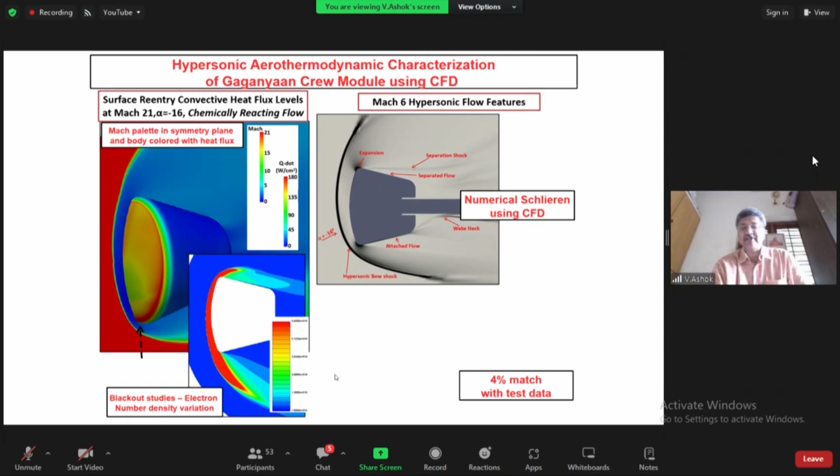We have a lot of exciting missions. There's a lunar sample return also, and a lot of work for the CFD and the associated technologies. So I find that there is a lot of exciting opportunities for working in this space vision for 2047. In fact, there are a lot of people involved, not only ISRO. There are academic institutes and private industries, all hand in glove in achieving this.